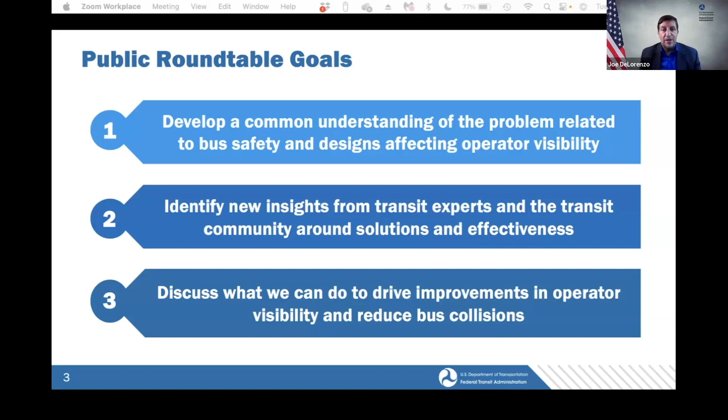In terms of what to expect today, looking at the agenda, we're going to start off with some level setting in terms of the safety problem and issues surrounding this area, and some of the analysis. We'll hear from some experts within FTA's Office of Research, Demonstration, and Innovation, as well as a presentation from the Center for Urban Transportation Research. Then we'll do a more facilitated discussion with others who wish to speak, including labor, the bus manufacturers, transit agencies, and others.

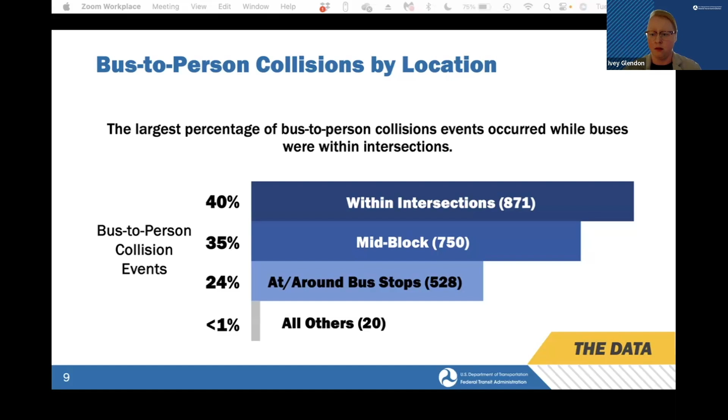The key takeaway here is that fatalities occur most commonly when the vehicle is making a left turn. Crosswalk pedestrians are particularly vulnerable as they attempt to use crosswalks while buses make that left turn. And this suggests that there is an issue of visibility and awareness for bus operators.

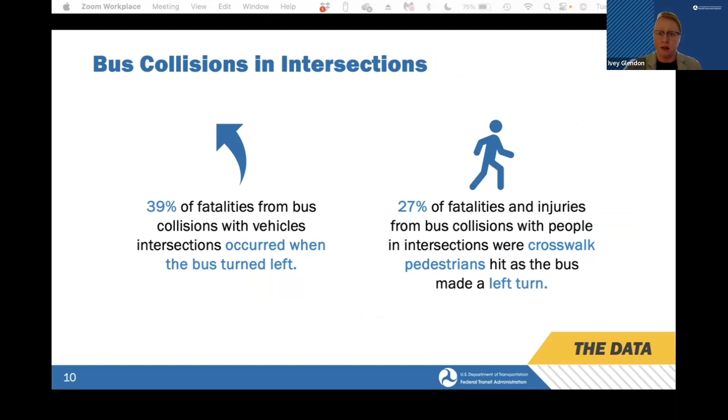FTA identified in its analysis 4 safety hazards associated with bus-to-person collisions, including vision impairment due to bus design and the environment outside of the bus, and entry into the bus pathway on the road by pedestrians, bikers, and micromobility users. Additionally, space limitations along the road from insufficient sidewalks or bus stops are also a safety hazard we identified.

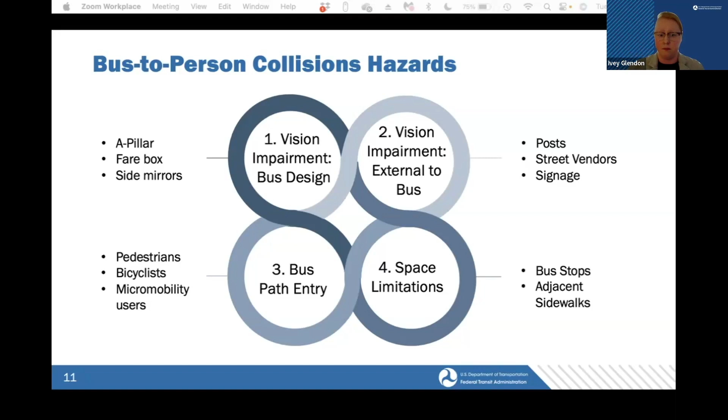As Joe mentioned, FTA issued a Safety Advisory 23-1 as part of its plan to mitigate the dangers posed by this particular hazard. The Safety Advisory asks agencies to review the risks and hazards associated with bus-to-pedestrian collisions at their agencies, with special focus on the design of vehicles and operator policies.

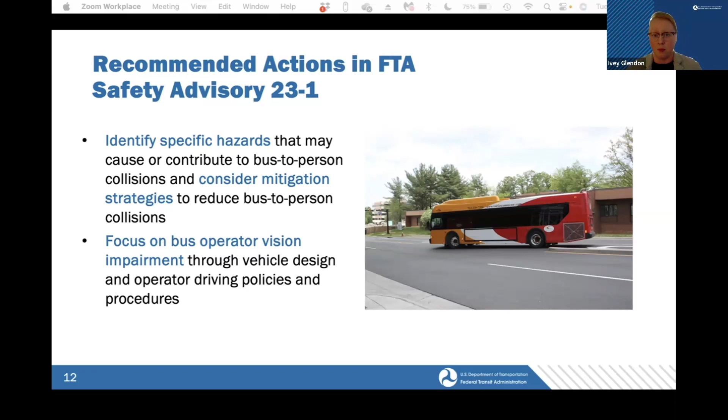And finally, I want to note that bus manufacturers will play a large role in the design and system improvements for safety. We're looking specifically at size, location, and types of mirrors, reducing the width of the A-pillar, camera and motion sensors to detect people outside of the vehicle, as well as audio and visual turn warning systems.

Ideally, the vehicle systems and design would be made with communications with operators regarding driving procedures to think about maximum effectiveness in vehicle design.

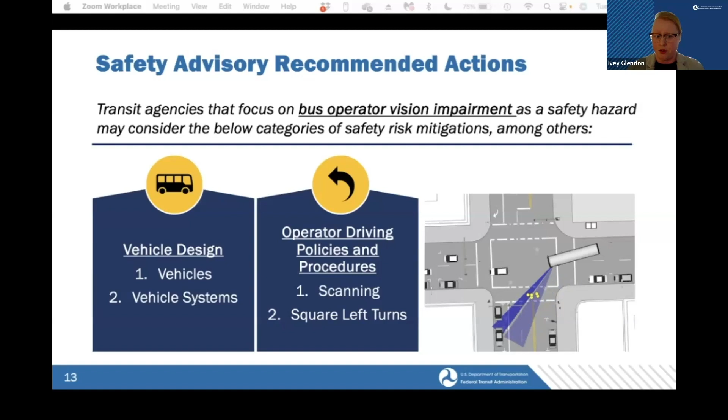With that, I believe I turn it over to Roy Chen from FTA's Office of Research, Demonstration, and Innovation to talk about FTA's research in vehicle safety.

Thank you, Ivey. Good afternoon and good morning for the folks joining us from the West Coast. So for this presentation, I will provide a brief overview of the safety research program at FTA. I will briefly go over the type of projects we have funded, our research focus areas, and high-level outcomes of the safety research program.

Broadly speaking, we have 3 types of research projects. Historically, the majority of safety research falls under the pilot demonstration projects. This project focuses on developing prototypes, test near market-ready products,

and adapt systems from other industries for transit use. The second type of project focuses more on the transit vehicle design. As Mary mentioned earlier, more recently, we have been investing resources in this area of our research. And the final category of our research involves standards or state of practice studies. We compile and analyze information on existing standards, nationally or internationally, and existing practices related to safety specific topics.

So for the pilot demonstration projects, these are usually conducted by teams that include transit agencies, technology vendors, universities, and other stakeholders. In the past 8 years or so, we have funded 34 safety research pilots.

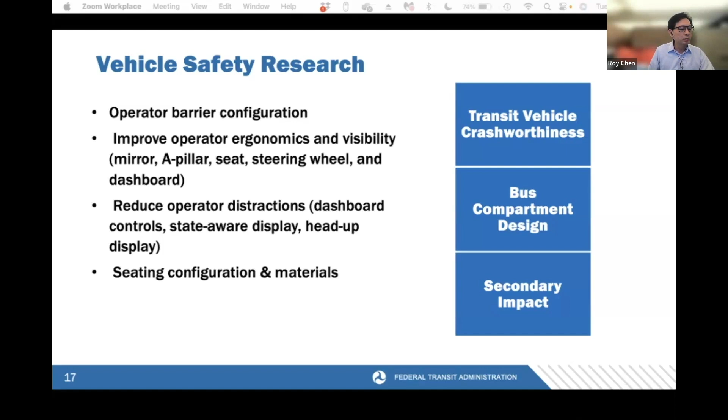As I said earlier, we have a plan to increase our investment for this type of research on the vehicle safety research for both the visibility issue as well as detection of pedestrians. So currently, some of the issues that we are looking at are operator barriers to prevent bus driver assaults, as well as enhancing bus operator ergonomics and visibility to improve comfort and prevent collisions.

Under our standard research initiative, we have published 26 technical studies. These studies provide insight into the availability of standards, current practices, and potential gaps in specific safety topics. These studies are conducted in collaboration with industry stakeholders and cover a range of topics, including transit vehicle crash energy management, battery electric buses and charging systems, medical fitness for duty and fatigue risk management, and more topics that you see on the list as well.

I have included a link on the slide to access all those reports. Alternatively, you can search for Standard Development Program to find those reports. Next slide, please.

Recently, we finalized 3 pilot demonstration projects that are highly relevant to this roundtable. The first one is New York MTA project, where we funded development of a prototype mirror to enhance bus driver visibility. Pierce Transit project, we allocated seed money on a project to develop a LiDAR system. And LA Metro project, where we tested a vision-based system designed to alert drivers about pedestrians and bicyclists.

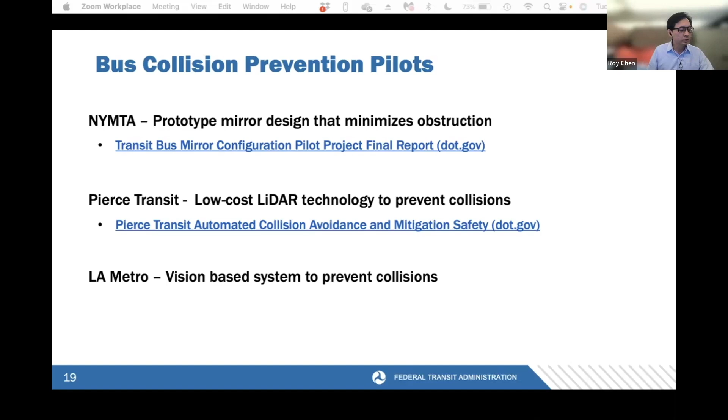I have attached the links to those reports as well. The LA Metro technical report is not ready yet, but will be available soon. The next presenter will talk about additional technical details on each of those projects and share lessons learned from the 3 projects. So thank you, and that's my email. If there's any questions, feel free to send me an email. Thank you.

Thank you, Roy. So it looks like I'm up next. Next slide, please. Good afternoon/morning to those friends on the West Coast. My name is Lisa Staes. I'm the Associate Director of the Center for Urban Transportation Research, or CUTR, at the University of South Florida. I'm very happy to be with you today. We are fortunate to be able to support FTA as the independent evaluator on SRD projects.

As Roy mentioned, we have 3 projects to discuss today that address collision avoidance and mitigation, 2 of which included technology deployments, and a 3rd that resulted in a prototype mirror design to reduce forward visual obstructions. First, we're going to talk about LA Metro. Next slide, please. Next slide.

LA Metro's SRD project included the testing of a collision avoidance system to determine system accuracy and effectiveness of that technology in reducing collision events. The system, which included both visual and audible alerts to bus operators, was tested on 50 buses during revenue service over an 18-month period. The technology was tested in both stealth mode on 10 buses, and then 40 buses in active mode.

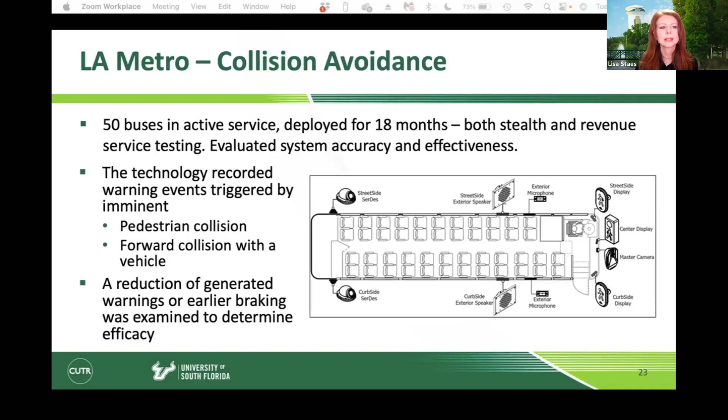Next slide. Some of the lessons learned in this particular project was that technology costs tend to increase as later generation products, whether hardware or software, become available. In this project, there were some quality control challenges in the prototype testing that led to delays and challenges in the testing phase with installation and technology integration. LA Metro did note that bus operator familiarization training is imperative for collision avoidance technology demonstration projects to be successful.

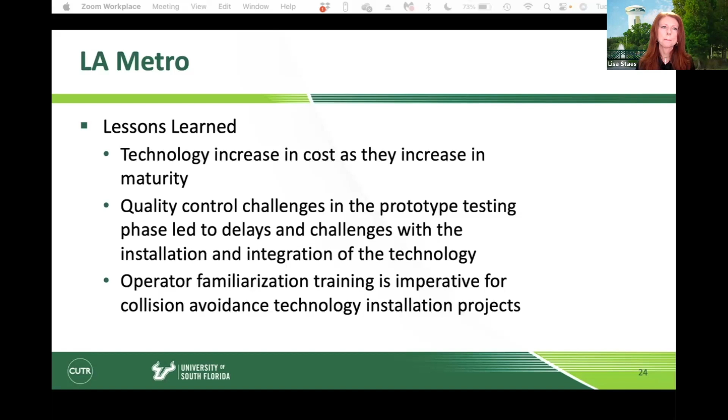Next slide, please. So New York MTA actually moved forward with this research project due to some issues they were having with left side and left forward turning movement collisions that they felt were due, at least in part, to visibility obstructions with either mirror type, size, and/or placement. So with their research team, they developed and evaluated a prototype street side mirror design for transit buses.

This process began with 3D scan and modeling the front end of transit buses from 4 different vehicle manufacturers. Through that effort, they were able to perform virtual simulations with system effectiveness metrics based on the 2.5 percentile female and 97.5 percentile male. They looked at mirror configurations that included their current mirror, which is a flat convex combination mirror, semi-curved high mount, and semi-curved low mount. Based on the results of that virtual simulation, they optimized a semi-curved prototype mirror.

It was modeled, and then they went through both static testing and 6 months of field demonstration testing on 10 buses per depot at 3 separate New York City Transit depots. The field demonstration also included a survey of the bus operators who were able to drive the buses that had been configured with...

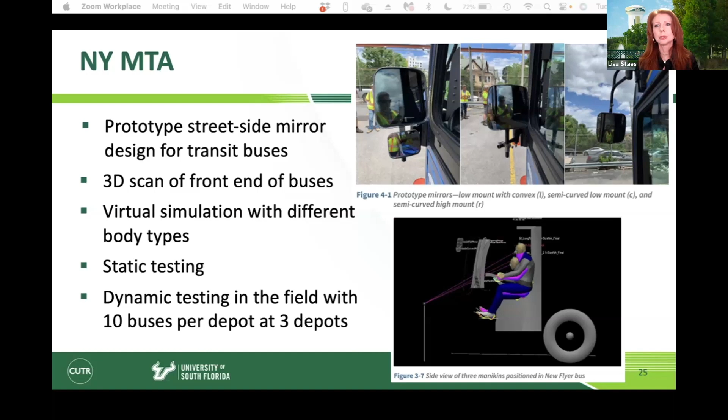Next slide, please. Some of the lessons learned through this particular demonstration project was that traditional mirror assemblies, both flat and convex mirrors, do seem to create significant obstructions to direct field of view.

Low mounted flat glass only mirrors resulted in the smallest obstructions due to the size and location of the mirror heads. A traditional high mount flat convex combination with a lower assembly created similar or worse obstructions for a range of tall bus operators. For 40-foot buses, the semi-curved mirror design provided the best combination of rear and forward visibility performance, with the largest range of visibility for bus operators and fewer side street incidents.

What was interesting is that the use of the semi-curved style mirror on an articulated bus, a 60-foot articulated bus, was found to have the opposite effect, which was quite interesting. Next slide, please.

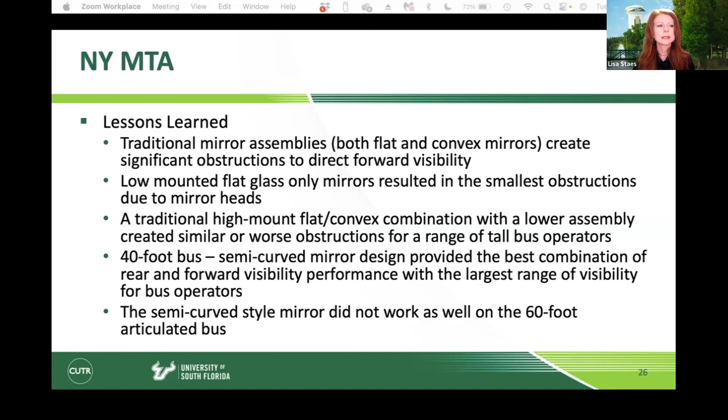The final SRD project I want to talk about was performed by Pierce Transit. Their project was a pedestrian and forward vehicle detection / collision avoidance warning system on transit buses. On 30 buses, they outfitted them with a 2D LiDAR-based system. It was front-mounted for detection. They installed a video processor in 3 of those 30 buses to help validate accuracy. They did perform some closed course testing at Virginia Tech's Virginia Smart Roads facility. That was used for validation and system calibration. It also included day, night, and weather condition testing.

Revenue service testing was performed for approximately a 9-month period in shadow mode, meaning there were no alerts to operators and no active braking initiated. The data logger did capture telematic data via their onboard detectors, and those were transmitted events to external servers for evaluation and the identification of event hotspots.

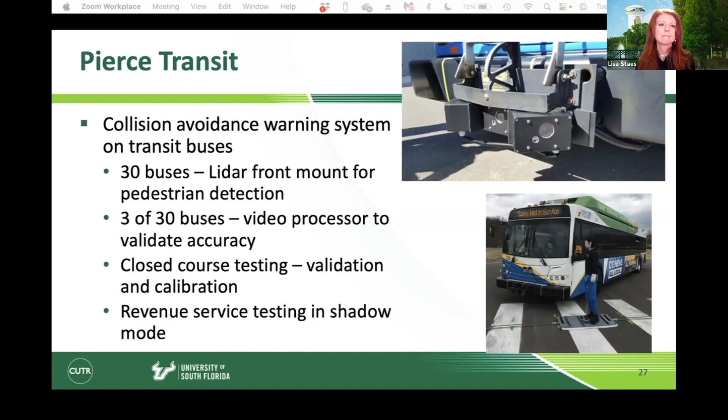Next slide, please. Some of the lessons learned through the Pierce Transit demonstration was retrofitting hardware and software systems on legacy buses presented challenges, as one would imagine, associated with sensor placement. As an example, when retrofitting a bus with a front bike rack, that created some challenges. Sensor placement can certainly create interference and false positive alerts. There were some data collection challenges related to transmission consistency and concurrency, which did result in an inability to prove accuracy.

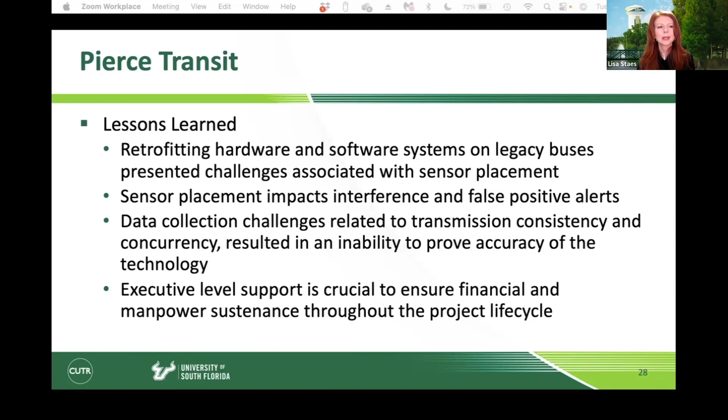And one of the most important points that they noted was executive level support at a transit system is crucial to ensure financial and manpower sustenance throughout the project lifecycle. And these project life cycles can be many years. So that was an important finding for the research team. And with that, that concludes my presentation. Thank you.

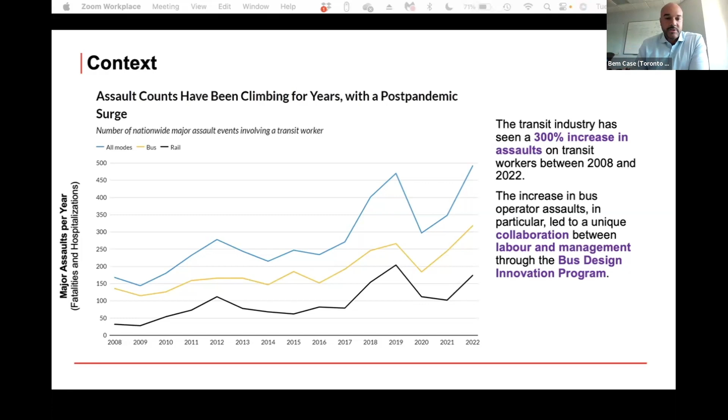In terms of the program overview, and I'll talk a little more about the governance in a moment, this is a joint labor-management partnership aligned around these common goals. We applied research towards the enhancement of safety and experience of operators, customers, and vulnerable road users, as I mentioned. We explore different design solutions rooted in empathy for human-centered design, and this is a very key point for us here.

Of course, we develop prototypes, adopt new technology, and go through a series of engineering trials to evaluate the effectiveness of these technologies and solutions. But we always make sure that the people whose environment we're looking to alter, whose risks we're looking to change, are involved in the process. So in this case, we're talking about operator engagement.

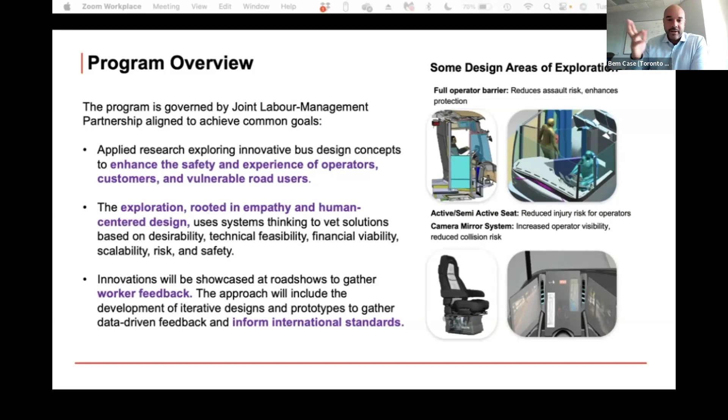Throughout the entire process, which I'll talk about briefly in a moment, there are repeated attempts to engage operators and seek their feedback, tweak designs, go back to them with new solutions that address the concerns, and capture the best practices identified by operators, all with the view of identifying what we refer to as a golden prototype. This includes the feedback of all relevant stakeholders, and that can then be approved between management and labor, and then implemented either on a go-forward basis working with bus OEMs, or as a retrofit solution to the existing fleet, or both.

Harvesting ideas from a broad array of different stakeholders, but also gaining engagement. So when it came to the youth challenge that we had done with employees, there's an employee engagement value there as well.

All these ideas are ultimately evaluated by subject matter experts and various stakeholders throughout the TTC, within the governance I'll talk about further. The program management team itself is the facilitator, making sure everything stays on time and budget, etc., but also that all the proper engagements happen. The steering committee, which includes Andrew Falotico, my partner on the line here representing ATU International, and myself, oversees the steering committee for the overall program.

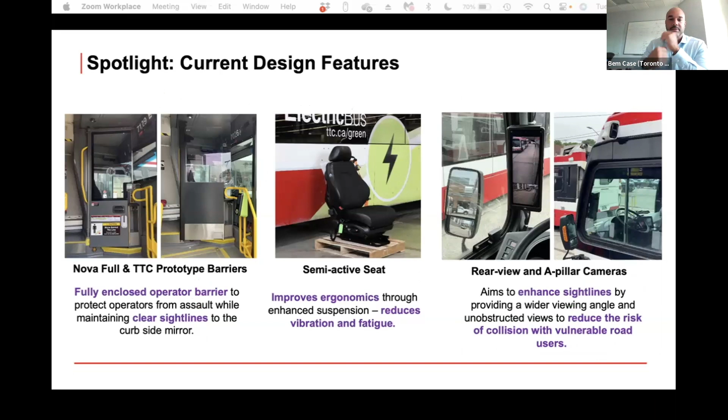Thank you, Bem, and greetings to everybody online today. Taking a look at this slide from right to left, we're going to look at the current design features promoted by the Bus Design Innovation Program. This process is about assessment and evaluation with stakeholders all coming together, with empathy rooted in the operator. We're looking at what the operator needs, at the health and safety committees making proper recommendations and putting innovations forward, and reevaluating to the point where we can mitigate potential exposure.

Starting from right to left, one of the innovations we're looking at is the rear view and A-pillar cameras. This innovation enhances sightlines by providing a wider viewing angle, and also provides unobstructed views to reduce the risk of collision with vulnerable road users.

In the middle of the slide, another innovation we're looking at is improving ergonomics through enhanced suspension - this is a semi-active seat which reduces vibration and fatigue. Once again, taking into consideration that the end user of this program is the operator, being able to support them in their work environment successfully.

On the left-hand side of this slide, you'll see a full TTC prototype barrier. The workforce that put this barrier in was ATU member workers, and they took the opportunity to create fully enclosed operator barriers to protect from assault. Keeping on track with today's subject, these operator barriers do maintain clear sight lines to the curbside mirror.

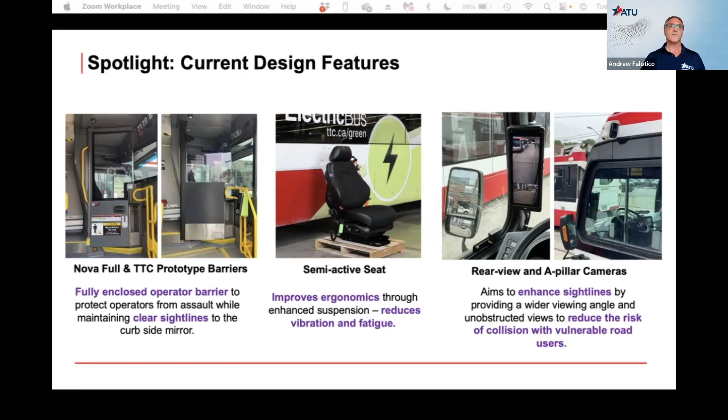Further highlighting these barriers, starting from left to right, taking a closer look, you'll see fully enclosed barriers with a supplemental panel that runs parallel to the dash. Once again, I want to make the point of not impeding any sight lines. The operator's work seat, when fully retracted back, even with someone of large structure sitting there, we've already tested to note that they can see the mirrors clearly.

Now on the right-hand side, which is basically the same bus but a different bus number, we have removed the fare box. You'll notice the fare box is outside of the workstation. There's been a lot of statistics based on fare evasion and assaults because of the fare box, but also keep in mind, in support of the operator being successful in their work environment, removing the fare box helps them ergonomically, which makes them more cognitive to their work environment.

When we take a look at the future pipeline for the Bus Design Innovation Program, we're also looking at other innovations - vertical airflow, a system for improved quality of health for passengers and operators. Given that we've come through a pandemic, it's very important to look at the future on how to have a positive transit experience, not just for our patrons, but also to support our operators to make sure they are healthy and safe.

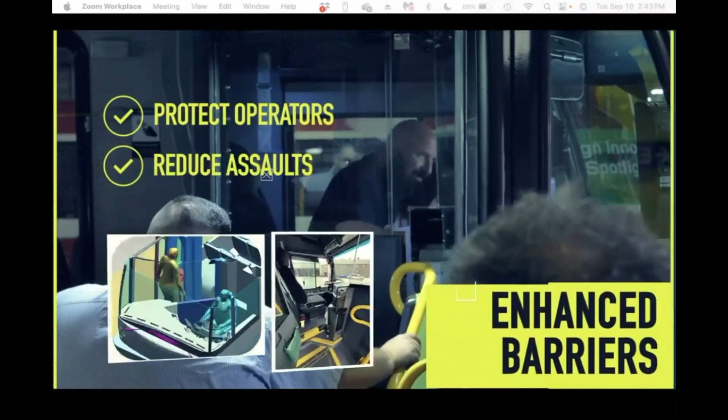This includes bus of the future design concepts and best practices to establish new global benchmarks in bus design and safety. Objectives include preventing assaults on operators through enhanced physical barriers to workstations, improving operator visibility through increasing sight lines, reduced glare, and removing obstructions. Eliminating injuries, especially musculoskeletal injuries, by optimizing drivers' workstation ergonomics.

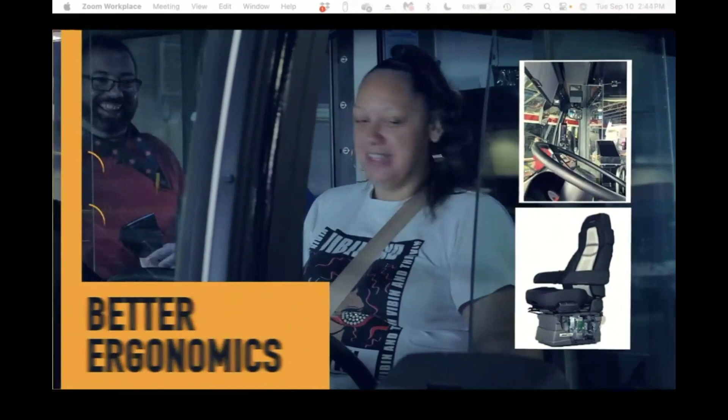Reducing exposure to viral transmission through improved HVAC design. The project will deliver both incremental and transformative changes, with the goal of creating a safer and healthier experience for operators, passengers, and the global community.

Bus Design Innovation Program partners are focused on practical, relevant, forward-looking solutions rooted in empathy for the operators, which empowers employees to take ownership of innovation. The Bus Design Innovation Program Committee will engage and support health and safety committees to provide input and recommendations while utilizing surveys with bus operators to measure, assess, and evaluate bus design features to be considered for potential implementation.

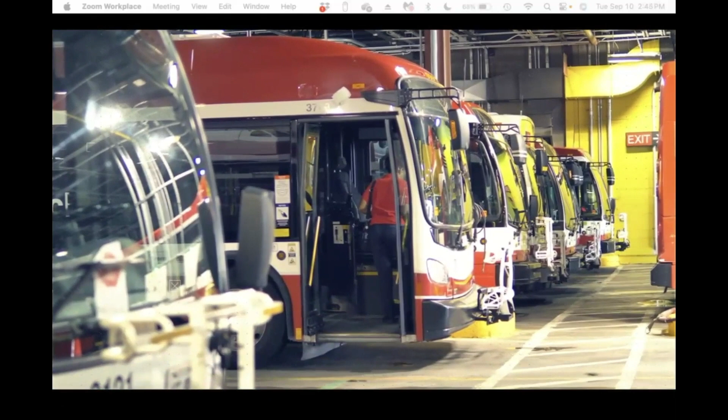Working together, united in safety. Our voice, our power, our future. The time is now.

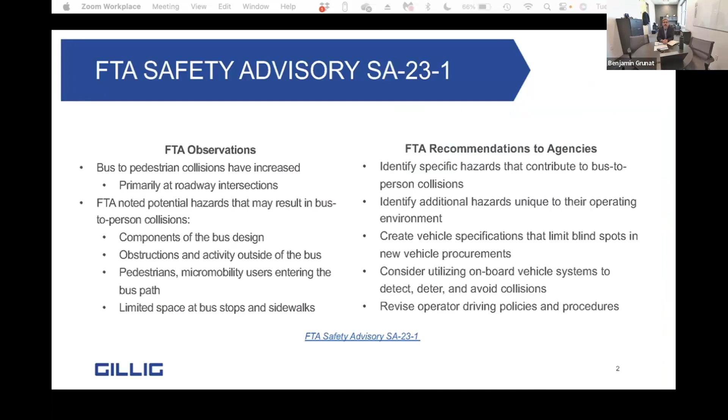Just a brief overview of the safety advisory. I think the FTA did a very nice job summarizing this, so we can move past this slide.

As we think about the front end design of the bus, the A-pillar is a common topic that's raised. This pillar provides structural support for the front of the bus, including the windshield opening, and it's therefore something that our engineering folks and those of our competitors all focus on minimizing while ensuring that pillar is able to provide the structural support necessary. In the US, we have a requirement to use zip-in windshield designs rather than bonded-in windshields like used in automotive applications. This leads to a minimum gasket width and therefore a minimum width of that A-pillar. A future consideration that the industry could make is an alignment to allow a bonded-in windshield, which could allow some additional design flexibility for our engineering folks to further minimize that A-pillar.

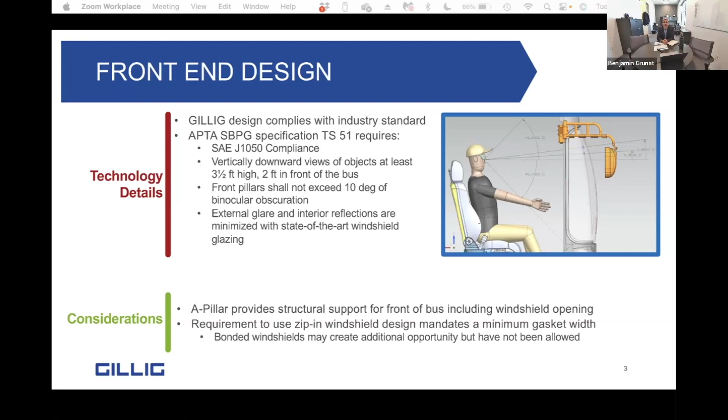Go to the next slide, please.

Mirrors are a common discussion point. These are very specifically specified by our customers and met by OEMs. The size, configuration, location, arm type, and mirror type are all specified by the transit agency, often in collaboration with their operators' unions. There's no consensus for what mirror is best from a visibility perspective, so as an OEM, we provide whatever option we have. In fact, we often release more mirror configurations each year than we have unique bus orders.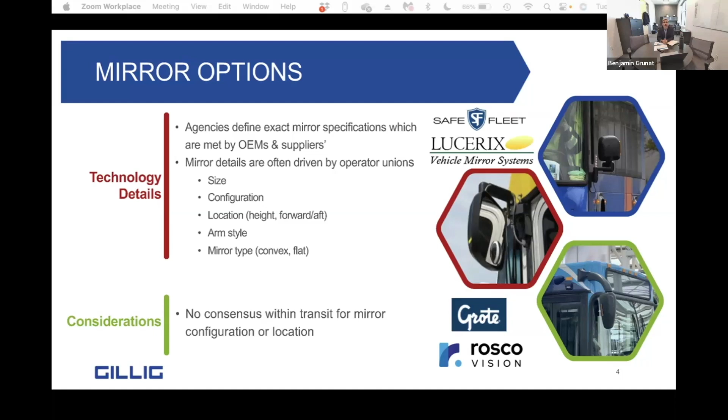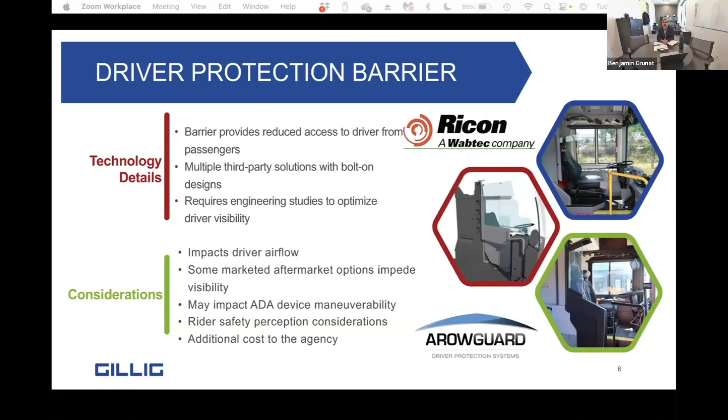As we look at some of the optional features: the driver protection barrier, a more common option in recent years. There are many different configurations provided by multiple suppliers, and much like some of the labor members have discussed, it impacts airflow. But one of the things we're very focused on is visibility. Some of the marketed aftermarket options impede visibility of the mirror, looking through glass in the barrier as well as the window to look at the mirror. So this is an area of focus to ensure these don't inadvertently reduce visibility.

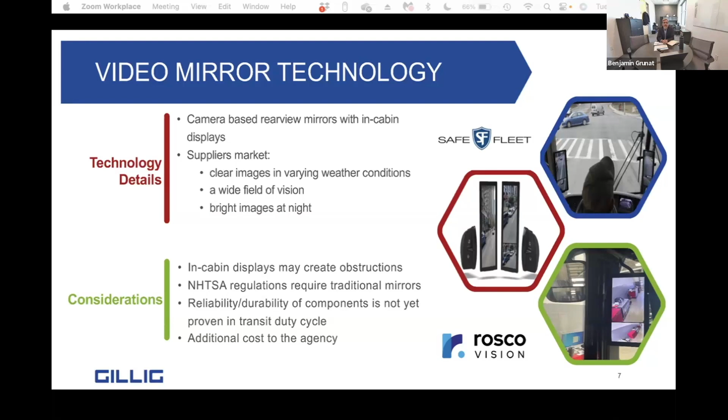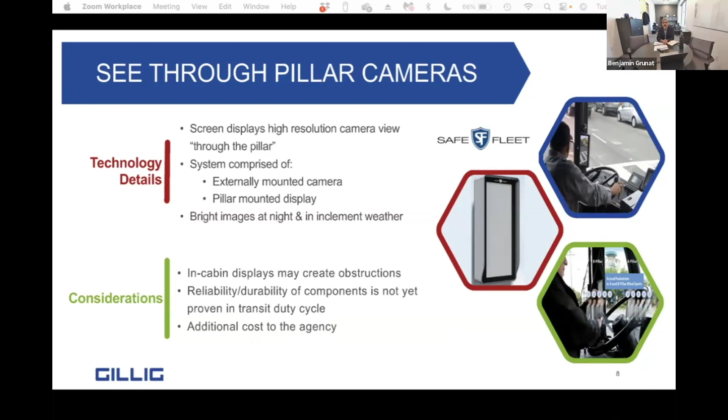I'll go quickly here. See-through pillars are great, but they're also mounted to that A-pillar further, potentially creating an obstruction.

Collision alert systems are offered. There are a variety of these, but the possibility of false alerts has been reported to us, and inclement weather can impair these systems.

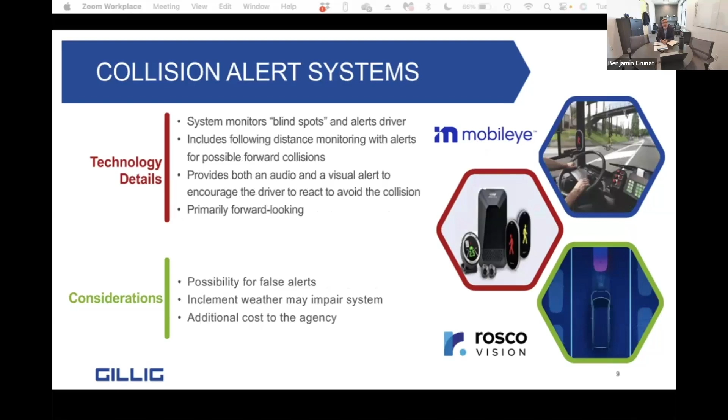Pedestrian turn alerts are systems that, when the bus turns, create an audible alert to pedestrians. It doesn't work for every vulnerable road user and can be challenging in residential areas.

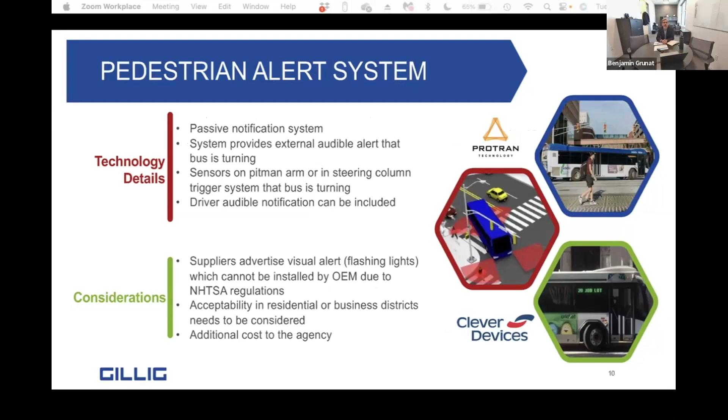A future feature we're looking at is automatic emergency braking. As an industry, we need to discuss how we handle standees. Further, radar systems are blocked by front bike racks, so that interference is a challenge to providing this.

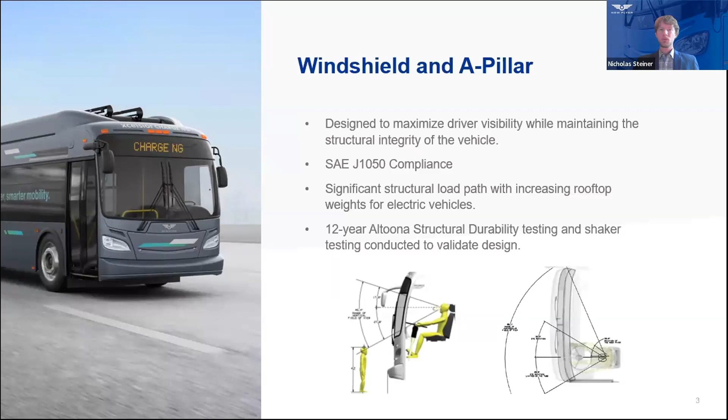As per the SAE standards, the Xcelsior has a vertical range of vision, horizontal range of vision, windshield wipe area, center line, and A-pillar obstruction angles that all exceed the standards' requirements by several degrees. When designing the Xcelsior, we designed it to exceed these requirements and treat driver visibility as important. Even with that, we understand blind spots are a concern, and we look to new emerging technologies to improve driver visibility and safety.

When it comes to exterior mirrors, we currently have 174 right-hand exterior mirror installations and 204 left-hand exterior mirror installations. Those are more than any production runs that we build in a single year. That's a lot of different mirrors.

These combinations are endless. All these different mirrors are due to different agency specifications and requests. Variations are attributed to placement of the mirror, vendor, size, style, color, material, and other features such as heating, turn signaling, power adjustments, and so on. For each of these designs, we have to ensure the exterior mirrors meet FMVSS 111 compliance. The placement and overall size is really dictated by the agency, so our design consideration for operator visibility is limited by those requirements. It's a challenge to maintain all these design variations, requiring additional engineering effort, purchasing effort, material coordination, and ensuring installers put the correct mirror on the correct vehicle.

Switching our focus to inside the cabin, we focus on increasing protection for drivers. We have developed a fully enclosed safety barrier that provides protective glass all the way to the windshield. As with other driver barrier protection doors available, driver visibility is a key consideration in developing it. We ensure the driver's protection system has protected glass throughout the sightlines of the operator so as not to obstruct their views. Transparent AS2 tempered laminate glass with anti-glare coating is installed to help reduce any glare effect.

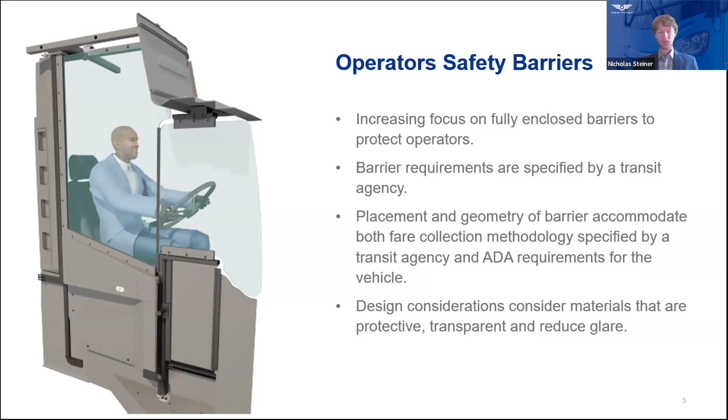Also, unobstructed vision is a major consideration in any driver safety design. Finally, looking at some technology-based solutions to help with driver visibility, at New Flyer we continuously try to stay at the leading edge of providing safety features for the heavy-duty market. These are several emergent technologies we are working with vendors on to improve driver visibility and safety.

Two technologies we do offer are camera monitor systems and level 2 automated driver assist. We currently offer the CMS, or camera monitor system. Vendors we have worked with have obtained the FMCSA exemption, but to have the CMS, as mentioned from Gillig, for FMVSS 111 requirements we still have to install the physical mirrors along with the CMS mirrors. Then the agency requirement is to get the exemptions and be able to remove the physical mirrors.

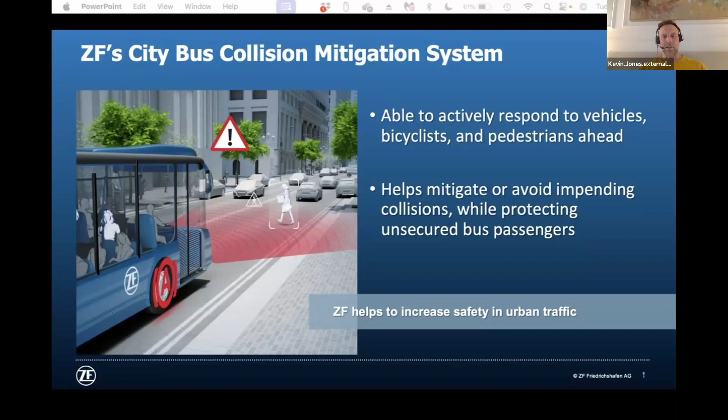Next slide. There's a front-facing - if you want to do 360 coverage, it's kind of broken down into front-facing with some sort of radar or ranged product, and then there's short range with cameras and radar. Next slide. This is kind of the side radar, it's just short range radar. The front is actually long range radar. This shows kind of the 360 coverage.

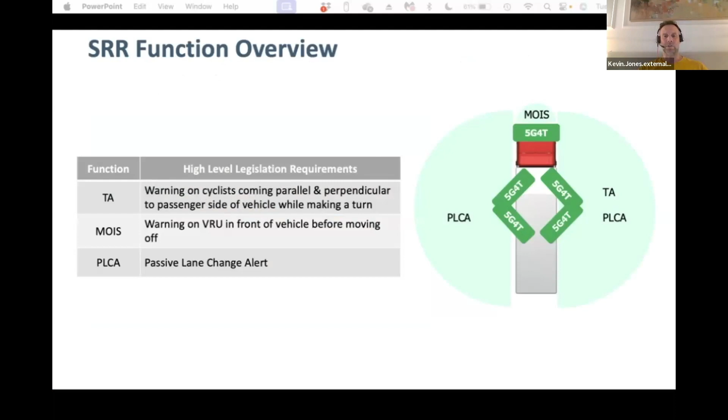And then lastly, there'll be, again, short range and long range, and the LiDAR that was previously shown as a long range solution. Next slide. This is kind of the whole system. And again, every company that provides a sensor is just going to end up having to hook up to this steering system or the braking system. That's why I wanted you guys to see this solution. It's a little more involved than you just needing to buy one part - the integration is actually quite challenging.

So why is the integration challenging? Well, force is mass times acceleration. Buses weigh like 10 times the weight of a car, so the heavier it is, the more impact it's going to have. So controlling that actually is very challenging. Next slide.

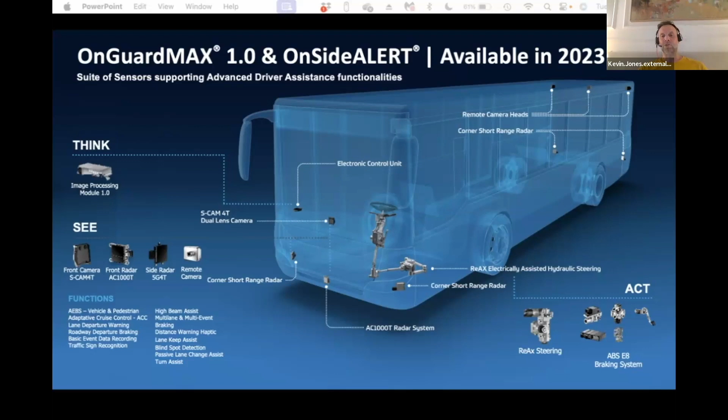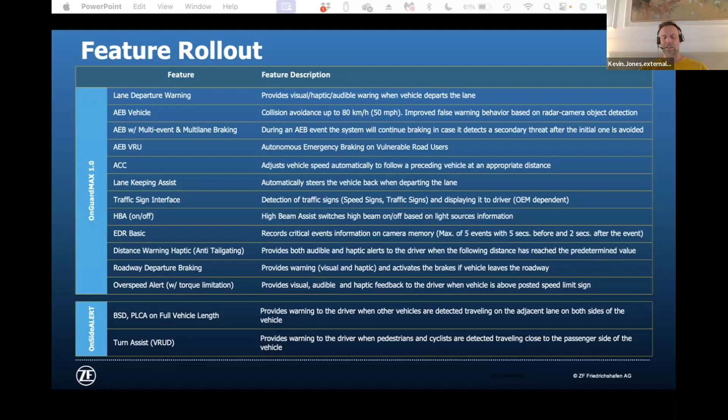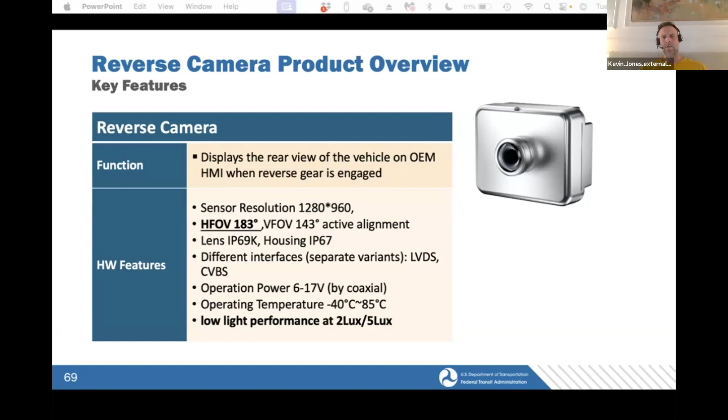These are just a list of features that transit authorities desire. I just wanted you guys to have the slide if you wanted to screenshot it, or it'll probably be in the PDFs. Next slide. You have 1 minute remaining. Thank you. And then reverse camera, next slide. And then the camera's just a standard camera, wide angle. Next slide.

So the main problem is this bike rack. Even with the LiDAR solution, the bike rack was up when tested. Once the bike rack is down, there's problems. You can work with different bike rack companies to get around that. So that's one problem.

The second problem is if you want the bus to stop, there's going to be a lot of false alarms because there's a lot of pedestrians nearby. For a car, pedestrians usually walk on the crosswalk in designated areas, but around a bus, pedestrians are pretty much everywhere, and that causes a lot of false alarms. So it may take even longer to get the bus from point A to point B because of all these false alarms.

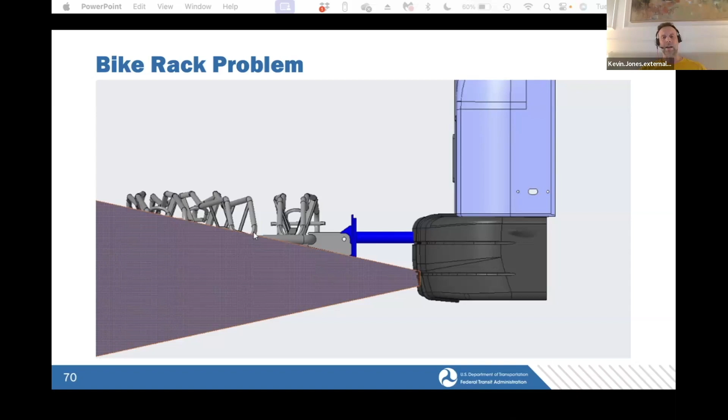And then the last point is insurance. You guys have to figure out if the system causes collisions, who's going to pay for that? I don't know the answers to some of these questions, but since we're posing concerns, it's something that might need to be taken into account. Thanks.

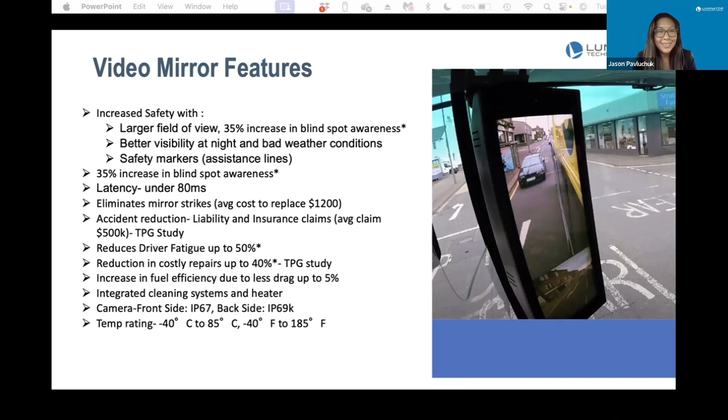Hello, this is Sarah Fox. I'll go ahead and start speaking. Thank you for the opportunity to share some of our work today. I'm an assistant professor in the School of Computer Science at Carnegie Mellon University, and I'm also an affiliate faculty member with the Safety 21 University Transportation Center at CMU.

With a team of researchers with expertise in mechanical engineering, design, and social science, we're examining the future of transit operations in an era increasingly influenced by automation technologies. We're doing this work in collaboration with the AFL-CIO Technology Institute, the Transport Workers Union, and the Amalgamated Transit Union. Our research aims to co-design future transit technologies by directly engaging with people on the front lines, namely bus operators and their passengers.

Some of the issues of bus safety that we've been exploring are related to the topic of operator visibility. This work has thus far yielded design ideas centered around enhancing accessibility to those with mobility impairments via two-way communication. Other ideas focus on creating new interfaces to convey vehicle intent to pedestrians and other vulnerable road users around the bus.

But what we feel a sense of urgency to share with you today is regarding a wider range of health and safety concerns that have arisen over the course of our research. In an in-depth study on work experiences of bus operators across the United States, we found a number of severe health and safety issues, which are not adequately being reported, investigated, or mitigated.